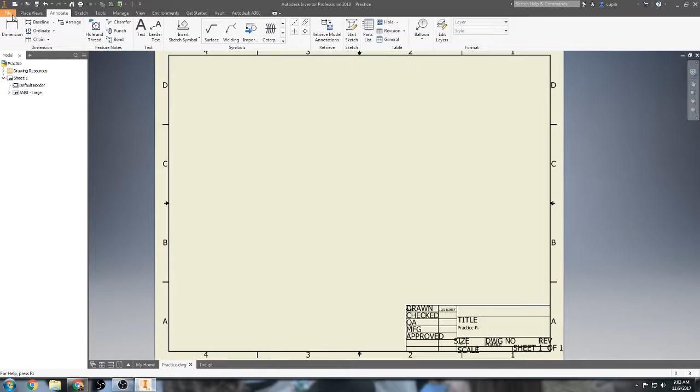The first thing we're going to do is showing the front and back in a drawing file. You need to go to File, go to Place Views, select Base. In this case I already have the tire project selected, but wherever you find your file, you're going to open it.

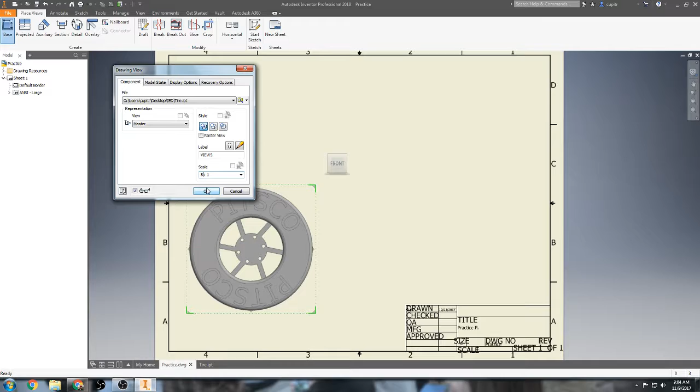If you look at this box, I can move it into the front view. I'm going to scale that up or down to the size that I want, change the size, make it like 8 just to make it a little bit bigger. I press OK, and now I have my first front view.

That's fine and dandy, but if I try to project these objects, a lot of people have problems showing the sides or the top, and that's not what we want. So the trick is to create another base, then use this cube to rotate onto the back, and it'll show that specific back view.

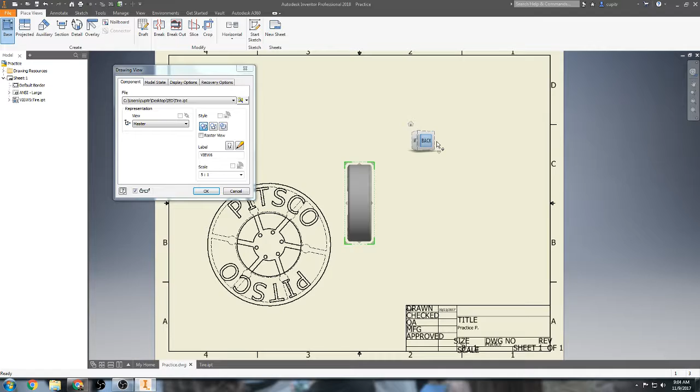You can then place that right here and press OK. I'm going to delete this one because I don't need it, and then I'll move this one up, and now you have your back view.

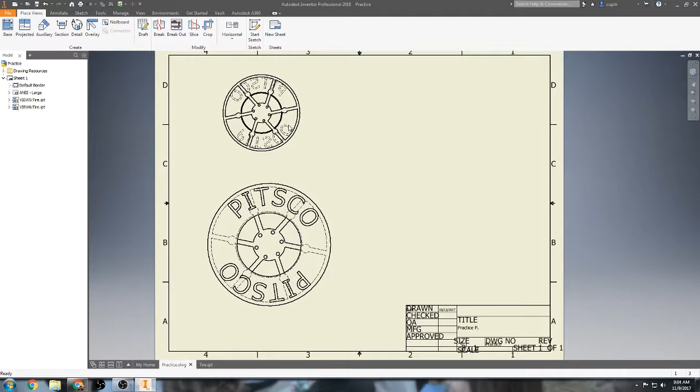Now another problem that I'm going to see, and a lot of you guys are going to see, is these hidden lines are kind of all over the place. There's too many of them.

The hidden lines, if you double-click here, it's not going to do anything, but if you double-click where the crosshairs are, it'll show you this prompt. The wireframe hidden lines are right here if I scroll over this. If I deselect that and press OK, it'll allow it to stay without the hidden lines.

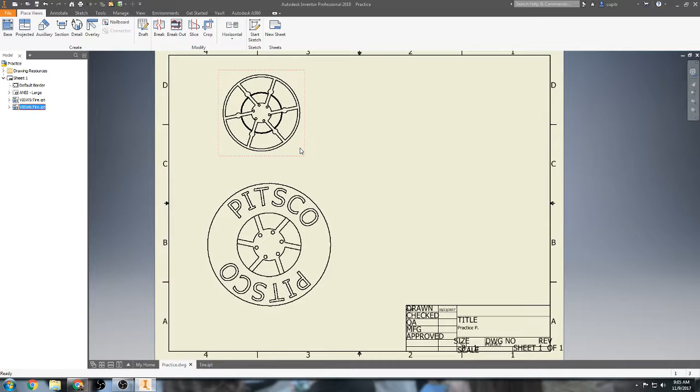If I double-click this one as well and take away those hidden lines, it'll show just the piece. This one's a little small, so I'm going to double-click that one again, I think I made this 8, so I'll make that 8 as well just to stay consistent. Move these around so that they look pretty.

Now I can project off of this one on the side here, as well as the isometric. Right click, press create, and it'll generate that concept.

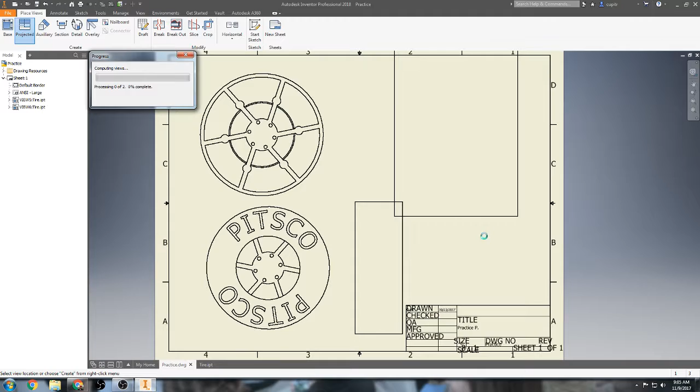You might notice that in here, this one I want to be colored, so I'm going to go hidden as well as shaded. Press OK.

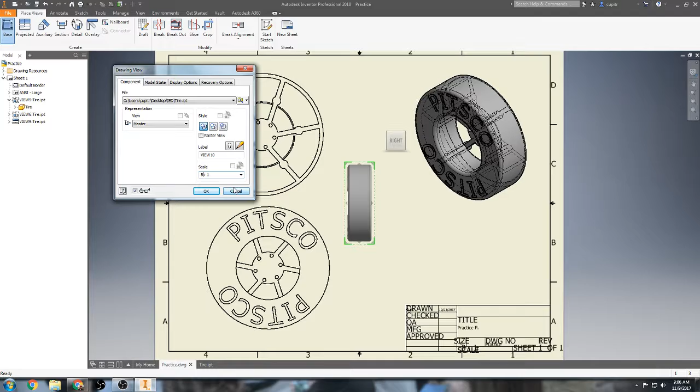Then I'm going to double click this one, and I want the hidden lines there, but I can't do that because it's hidden. So what I would do is delete this one, and create another base if I want to kind of cheat the system. Go to the right, show it, change the scale to 8 again just to stay consistent. Press OK, and now I can modify, and you can see all those hidden lines.

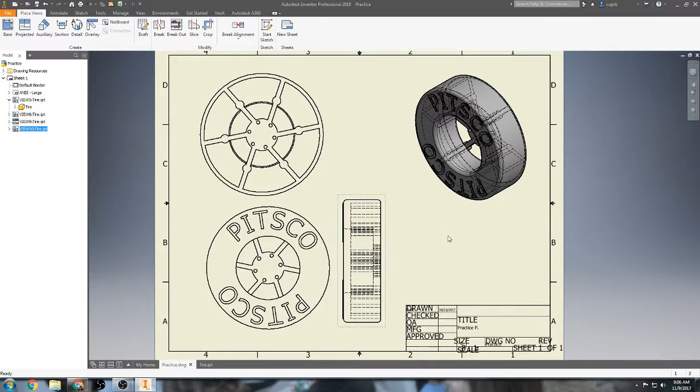Now I had a student ask me how they're going to dimension these hidden lines, since there's a lot of hidden lines here. The best way to do it is just to find the specific ones that you want to modify. I'm not going to show you how to section this out, which is what you would do in a realistic view, but we're going to go good on that for now.

So I got this one done. Showing front and back in a drawing file is good to go. Next, how to create an arc for emboss.

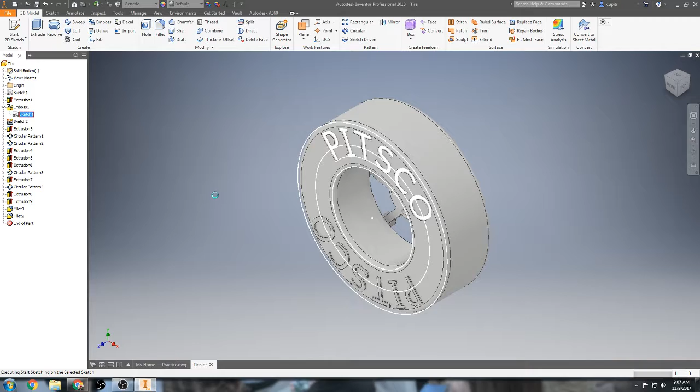So if I go back to Inventor here, and I go back to this tire, the easiest way to do it, I'm going to look over here to Emboss, and I'm going to open this sketch that I've already created just to recreate and kind of show you. What the easiest way that I like to do it is, the circle is already created to create the extrusion.

The easier way to do this is to do an offset, which is right here in Modify. If I use offset, it'll make a specific circle that's parallel to the circle that's already created, and then I can create a solid circle. Now the problem is if you use that as your geometry, it's not going to allow you to emboss or to write text onto that line.

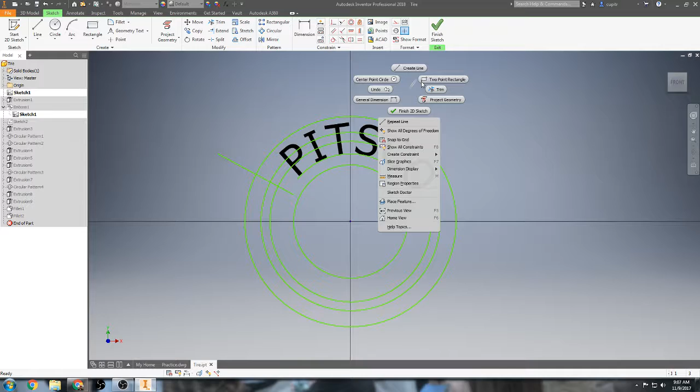So what you're going to do is draw a line anywhere you want, it doesn't have to be precise, just a random line, press create or OK, create another line over here, press OK, and then trim everything that I don't need. In this case I'm going to trim around that big circle, trim here, and I don't need any of this. Then I can go back and delete these lines, and now I'm left with what I need, which is this arc. From there you can watch the other video I showed you on how to insert and wrap around geometry or text.

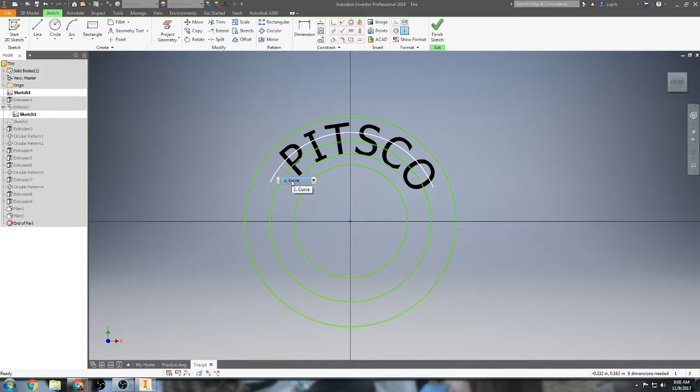It's called geometry text, which is right here. I select that, new geometry, and then I can go inside and make my text and my embossment.

The next thing you're going to want to see is we've got embossing on both sides. So if I go back to Inventor, I'll finish that sketch and ignore what I just did. The easiest way I would do this, and again there's many ways to do the same thing, is use the circular pattern that I've already taught you once.

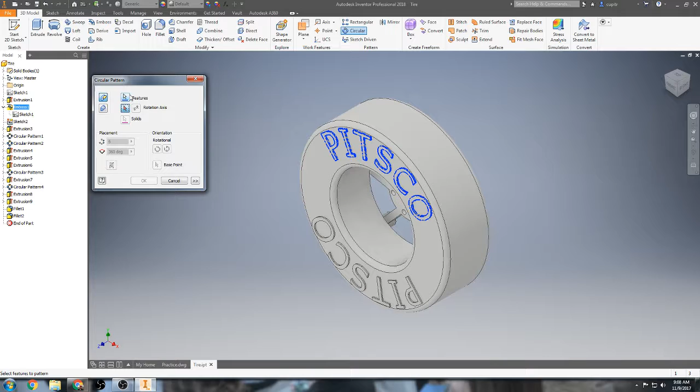If you go to circular pattern and select the embossment that you have checked, select the rotation axis, which is just this outside, and then manipulate it only twice, it'll create a mirror image on the other side. You press OK, and it won't let me do it because I already have mine, but realistically it'll show you both sides of that same embossment.

If I go back, filleting. So I have, let's say, an edge here that needs to be filleted. A fillet is basically just creating an edge and allowing it to be curved or rounded.

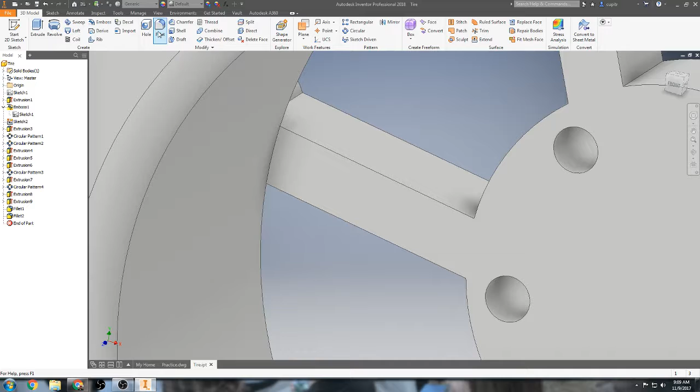So once you have the solid mark, I have an edge right here. Fillet is up here in the top, in Modify. Once I click that, you'll see a radius right here. Once I click the edges that I want to create a radius for, I am going to modify this radius so that it'll work. A lot of times when you don't have a lot of material, you'll have to make it super small, so I'll make this 0.05, which is not even small enough, 0.005.

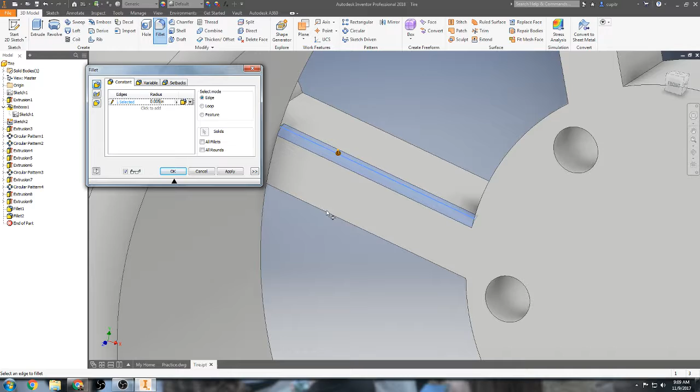And as you can see, it arcs that specific thing. Then I can do another arc, I can do multiple arcs at the same time. Press Apply, and what it'll do is, as you see now, that piece is now arced.

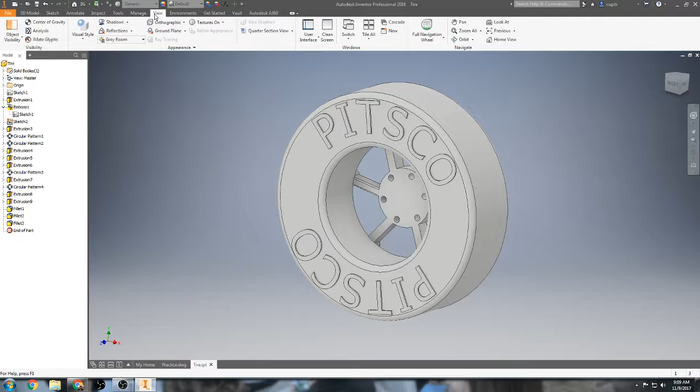One thing a lot of people, I didn't show this before, is if I don't want this view to look fake, I want it to look realistic, I go to View, Visual Style, and then I can go to Realistic, and what you're going to see now is what the curves would actually look like in real life if I wanted to 3D print this or whatever the circumstance was.

So that's filleting. Revolving is the last one. That's a completely new thing.

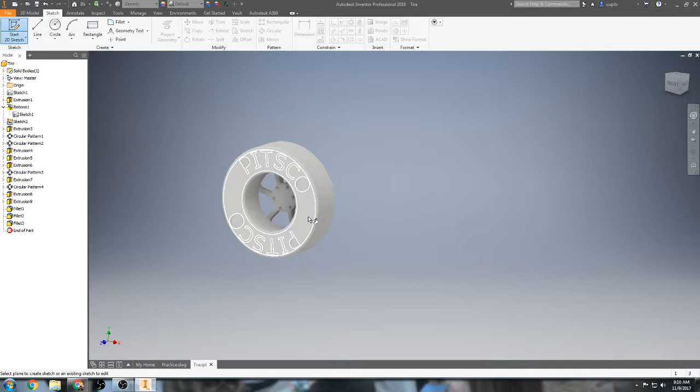So let's say I want to start a new 2D sketch. That's the first step. I'm going to create a new 2D sketch just on this surface to show you an example. The difference here is that a revolution, which is what it's short for, is basically revolving a section of a part.

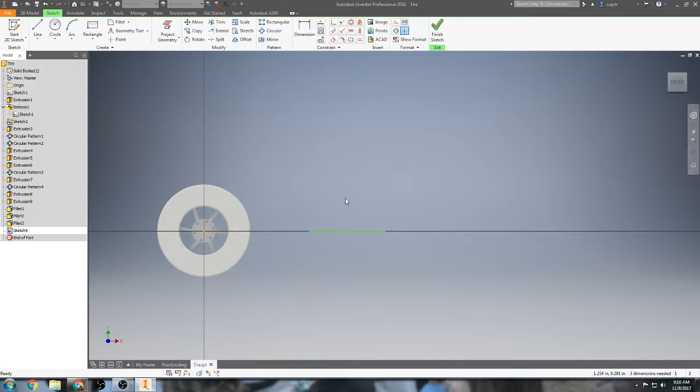So the first thing I'm going to do is draw just a basic line. This is going to be my revolving axis that I'm going to revolve the piece around. Then I'm going to create from that geometry just a random aspect, and in this case I want to create a tire. So I'm going to use an arc here after I create the other line, make those semi-even, and then create an arc from this point to this point, maybe like this. Now I have this object.

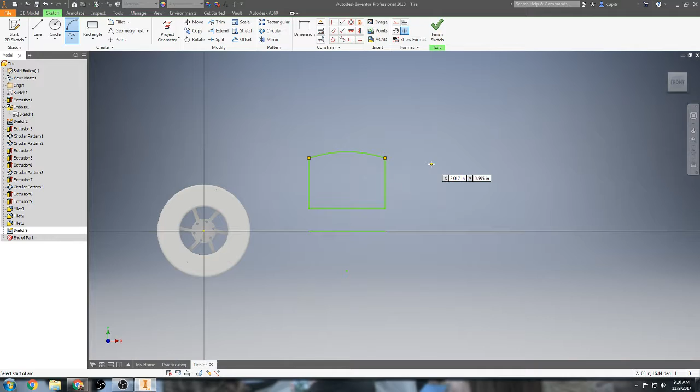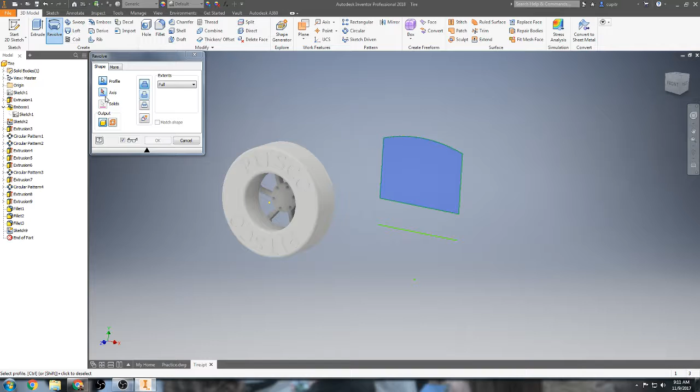Now the new thing is once I finish that sketch, you're going to see up here in 3D Model there's Extrude, what we've been using, and then Revolving. Revolving allows this section, so I'm going to select Revolve, and the first thing I want to do is join. I'm going to select the profile, which is going to be this profile, and I want it to revolve, completely wrap around this axis. When I do that, it creates a full tire aspect, and now that arc that you guys took all the time to do is literally done in one step.